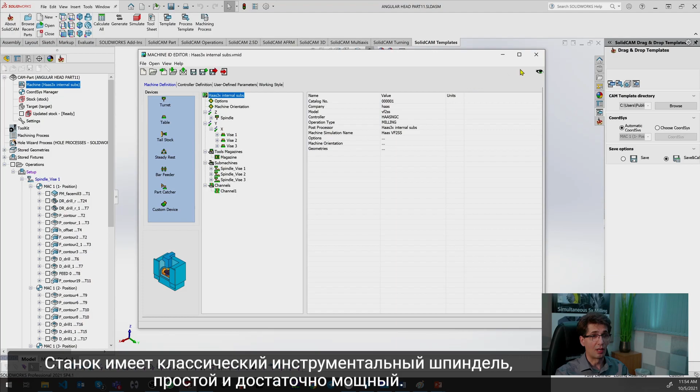In the following example, I want to show you a simple prismatic 3-axis part, machined on a 3-axis machine. Let's see the machine. This machine is a Haas VF2, really simple one, classic, very powerful, and we are using 2 vices for this part. You can see it in setup.

Vice number 1 holds the part for the initial state, and vice number 2 holds the part for the second operation. So once you click here on vice 2, you can see also the second part. It's in transparent mode, so you can see this is the initial one and the second operation.

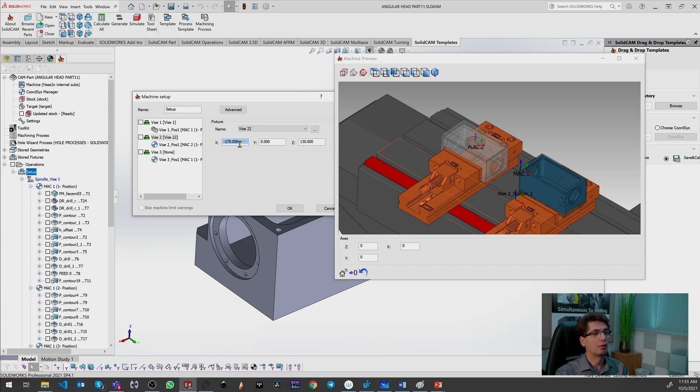Here is the setup. I am going to change it a little, just drag it 100 mm in X direction, make it a little bit closer. So what I see here is the order of operations, and let's try to analyze it. I'm not going to open each operation and show what's going inside, but let's analyze the order of operations.

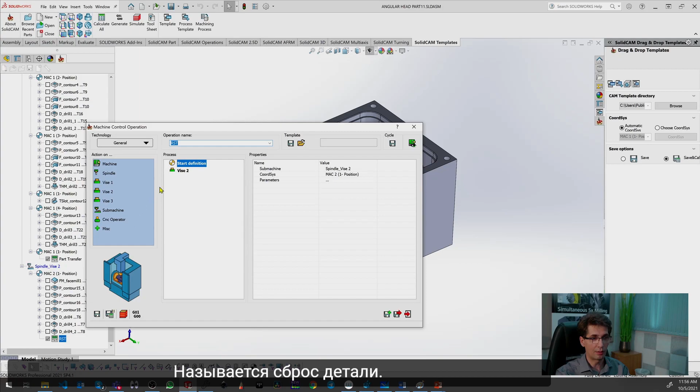So we have the first side machined with MAC 1 position 1. After it we have a part transfer machine control operation, machining of the second side, and the last machine control operation, which is very important for us, called release stock. I'd like to name it RST.

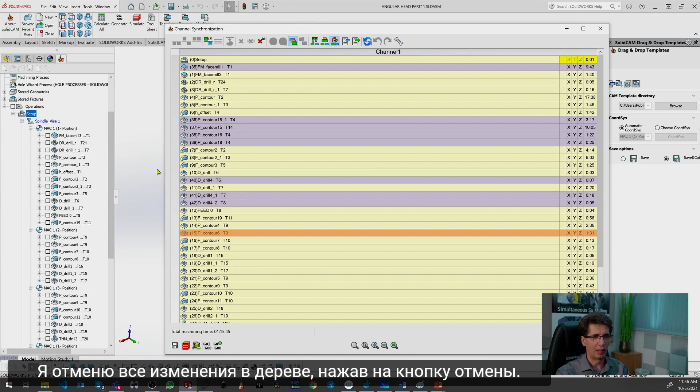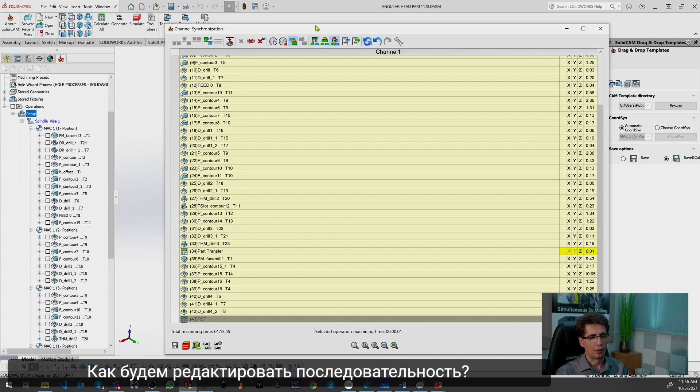So I can go to the setup, right click on it, channel synchronization, and see what we have here. I will cancel all changes in the tree by pressing the X here, and 1, 2, 3 order. So what I see here is the setup, part transfer, and release stock, same as we see in the CAM tree. To understand how to edit it, I can switch to table color view, and now I see it's in different colors. The green color is the first side, and the blue color is the second vice working.

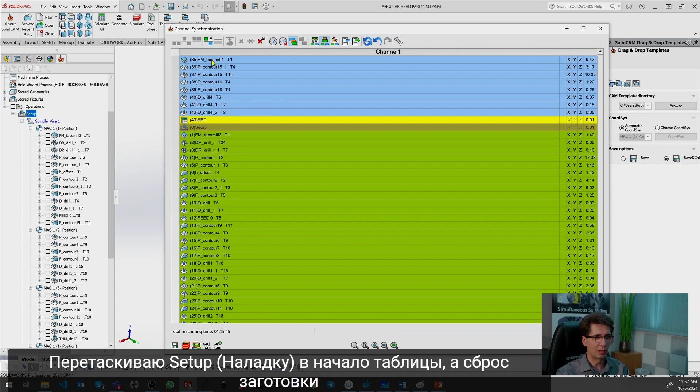Now I can go after the part transfer, right click on it, and add a new workpiece. Once I edit it, all operations jump to the start of the execution order. Now I can drag my setup to the start, drag the release stock to the end, and now I can edit the order.

So first, I want to analyze by the tool numbers if I can save any kind of tool change time. So let's see, I have a T8 running here, and the same tool is used on this side. I can just drag T8 to the second one. Where is it? Yep. And now you see this tool will not change on the machine because the same tool is used in both operations.

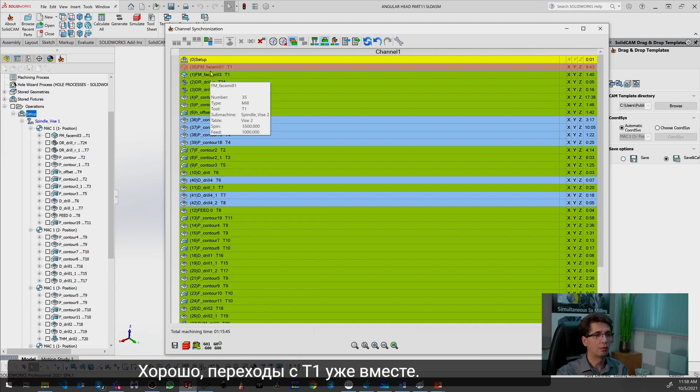Same I can do with T7, T6, and T4. I can drag a number of tools by single dragging, and T1 is already together. So what I see here is 1, 2, 3, 4, and 5 tool changes were skipped because they're not necessary anymore for this kind of order. So I didn't change the operation technology, tool path, or cutting conditions, but I still get 35 seconds of time saving only by reordering the operations without changing any technology.

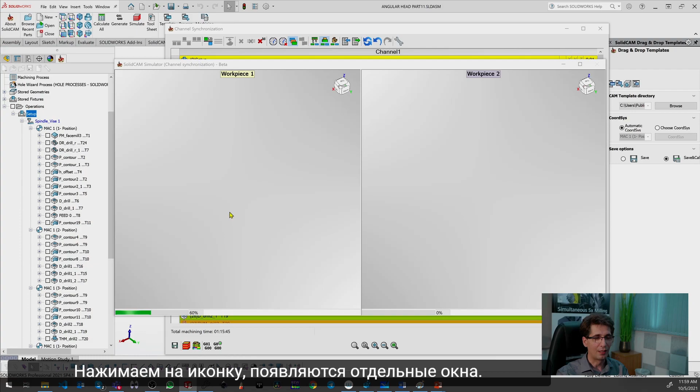So how can I see now in simulation what will happen on the machine? I will save it, and now you see in the toolbar we have a new icon called SolidCAM simulator. If you run it from the channel synchronization, it will always run in multi-channel mode. If I press on it, I will see two separate windows that show us what will happen on the machine. Let's rotate it a little,

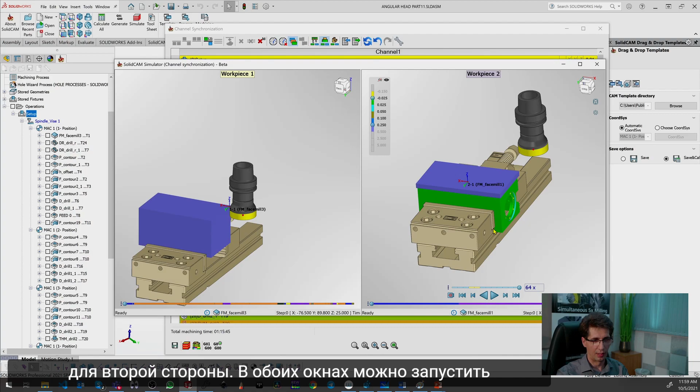and see how it looks. So first, you see the initial workpiece and you see the machined workpiece for the second side. In both windows, you can run the simulation and stop it, depending on which window your mouse is in.

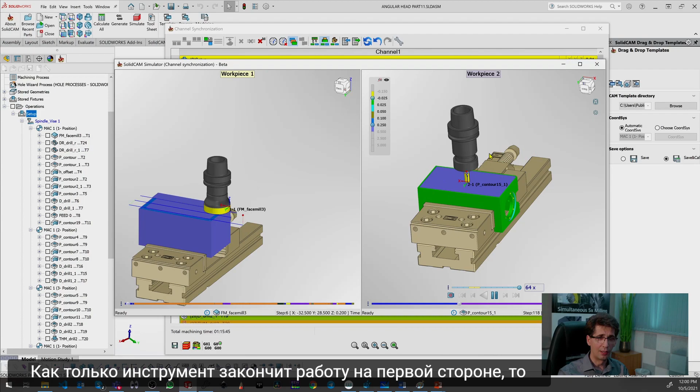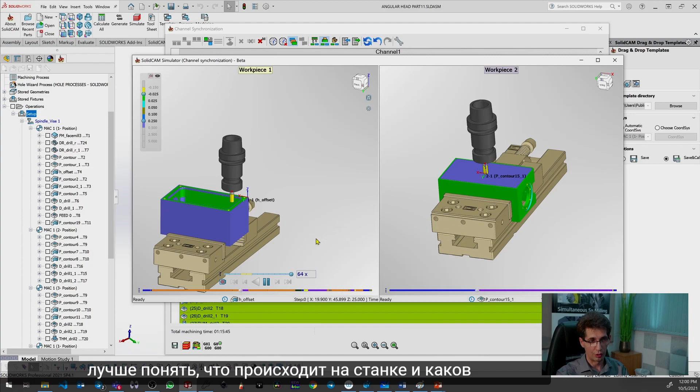Okay, if I run it, you will see the T1 face mill running on the first workpiece, and once it's finished, it's going to the second workpiece. Once we reach T number 4 here, you will see the operation execution will be back to the first workpiece. So it helps us to understand what will happen on the machine and what's the real execution order for this part. Here we see it's back to the second screen.

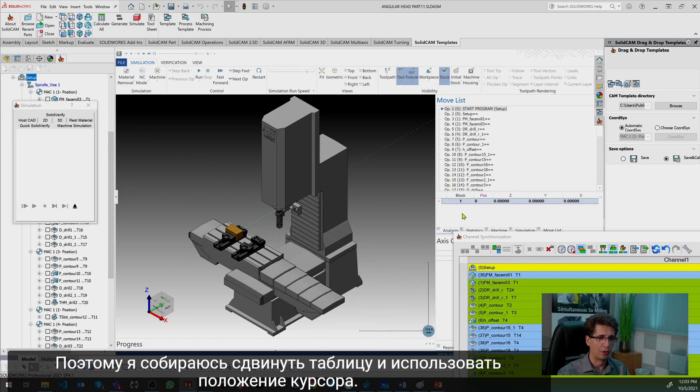I will stop it, okay, and run the machine simulation. Of course, machine simulation will show you the whole machine with all elements inside, and if you're running it from the channel synchronization, it will automatically highlight operations that are executed on the machine. So I'm going to move the list and just drag my mouse there. You see operation number 36 is executed now with T1, so I can go and see it in simulation.

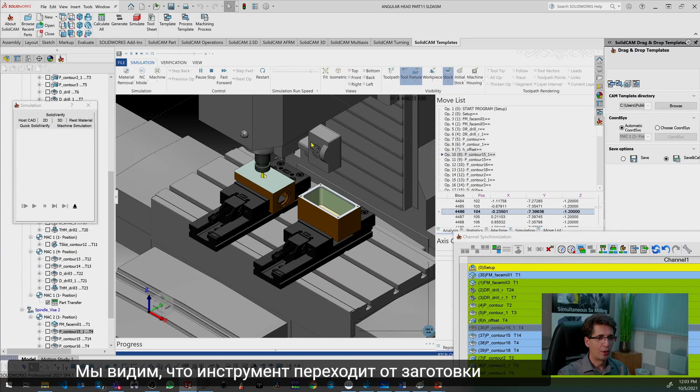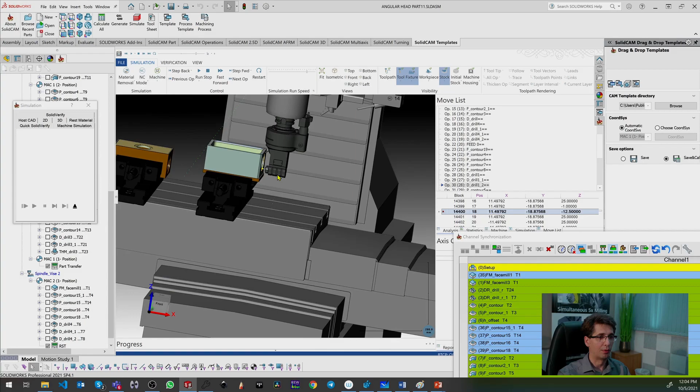So let's run the whole simulation and try to understand if we have any problem inside. Of course you see the tool is jumping from workpiece to workpiece, and it's what we designed. It saves the tool change time. We see now the first problem is recognized. I will stop here and try to understand what happens. Okay, we have a small collision here. I think it's okay for me because it's a cooling pipe. It will not really happen on the machine. It's like a part of the 3D model that can be removed.

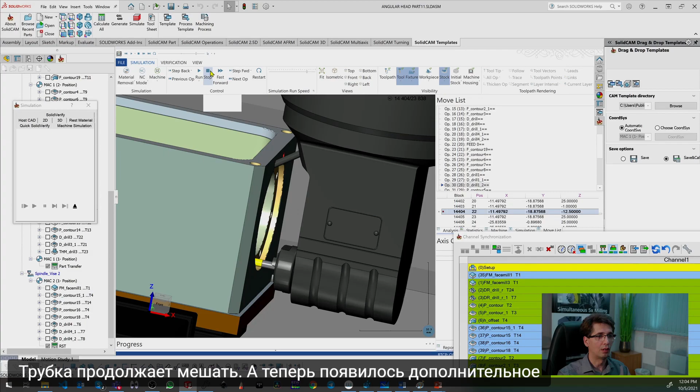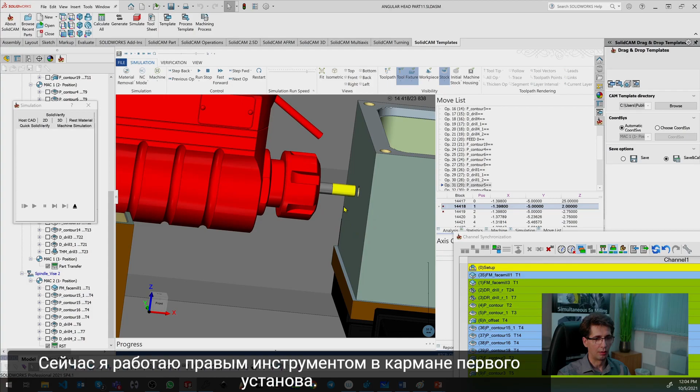And let's continue forward. Okay, we have again the same collision. The tool continues to collide, and now we have an additional collision, but it looks much more real than before. I will stop here and let's see what happened. I'm working now with the right tool on the pocket on the first part, on the right vise, and at the same time I have a collision of the tool with the left part. So how can I solve it?

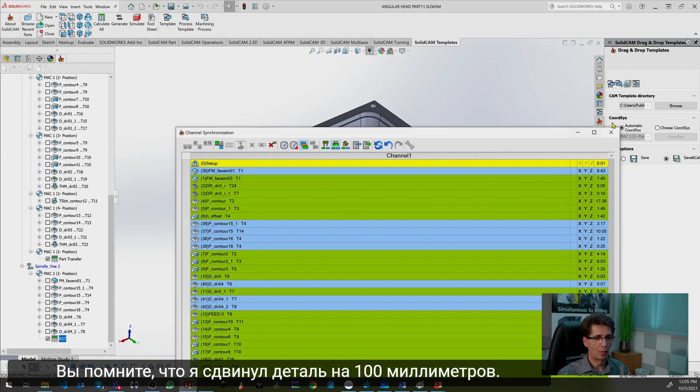Let's stop the simulation and go back to the setup. You remember I moved my part 100 mm. Of course it was on purpose. So let's move it back, and you can verify it in machine preview and see if the distance looks good for you. I think, yep, it's good enough, and let's go back to the simulation. I don't want to start channel synchronization now. I will directly go to simulate and machine simulation here.

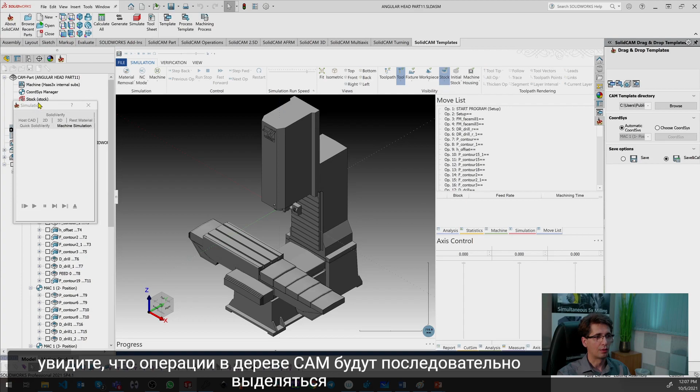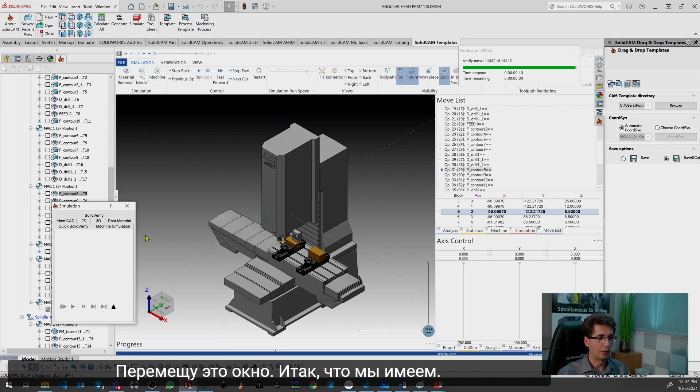Okay. Only one difference: you will not see the real order of operations, but you still will see the highlighted operations in the CAM tree according to the part execution. So if I scroll to the first operation, you will see the operation face mill on the second vise is highlighted. But let's go to the problematic one and try to see what we have now. It's calculating the updated stock. I can move it a little here. And what we see here, okay, there is no collision anymore, and the machine can cut this pocket without any problem.

Okay. Let's go back to the presentation. So as we've seen in this example, channel synchronization can be used even on a 3-axis single channel machine. First, it's used to simulate the multi-sided machining workflow. It helps you to detect collisions between all workpieces that you're going to machine on the CNC machine. It helps you to optimize the machining process and reduce the machining time by skipping tool changes. And of course, once you are using this kind of machine setup, you are reducing run-to-run cycle execution time by adding more parts to the single setup. It gives your machine more runtime and less idle time.

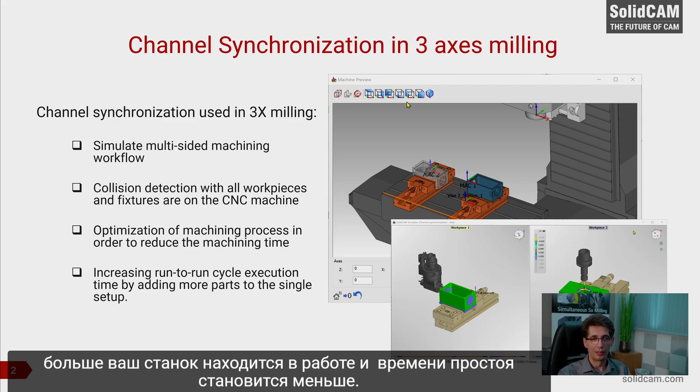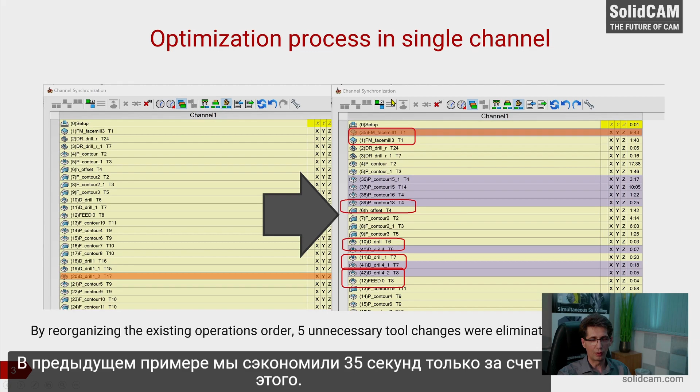Okay. So what we see here is that the initial CAM tree can be optimized by simple drag and drop to avoid unnecessary tool changes. In this previous example, we saved 35 seconds only by this feature. Also, you can verify your execution order in 2 different environments. The first one is machine simulation. Machine simulation gives you the full simulation of what happens on your machine. You can see collisions between all components, even with components not involved in the current cutting process.

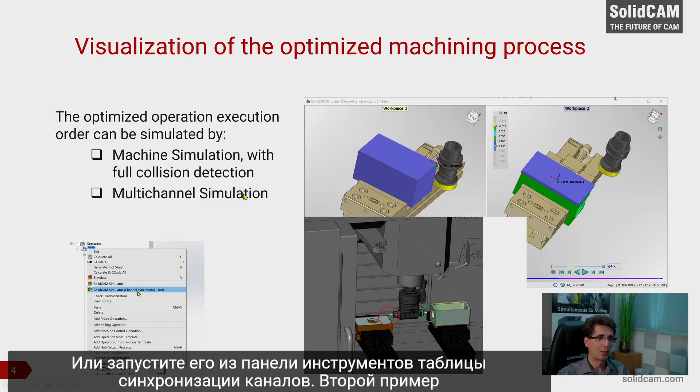And of course, you can use the multi-channel simulation, a new one, to emulate and simulate all processes coming on your machine in all workpieces involved in the process. Each workpiece will show in a separate window. You will not see the collision between workpieces like in machine simulation, but you will see the real operation execution order. To run this simulation, you can go to the setup, SolidCAM simulator in channel synchronization mode, or run it from the channel synchronization toolbar. A second example of using single channel synchronization is working with a multi-table machine and single channel. Let's go to the example.

In this example, I am going to use also a Haas machine, but a very interesting one. It's a new UMC Duo machine, which is what we used to prepare this presentation. So first, before I start to describe what's done here, let's open the machine and see what's happening inside.

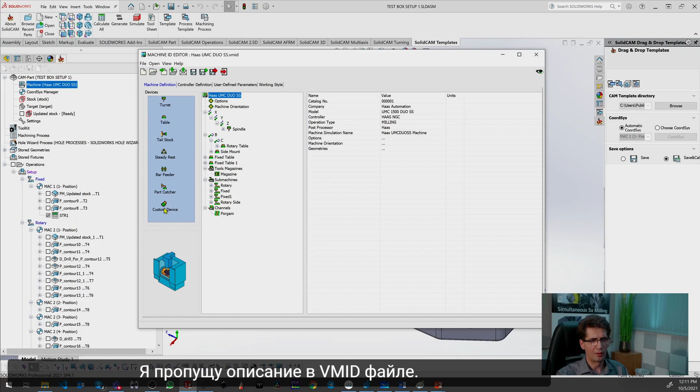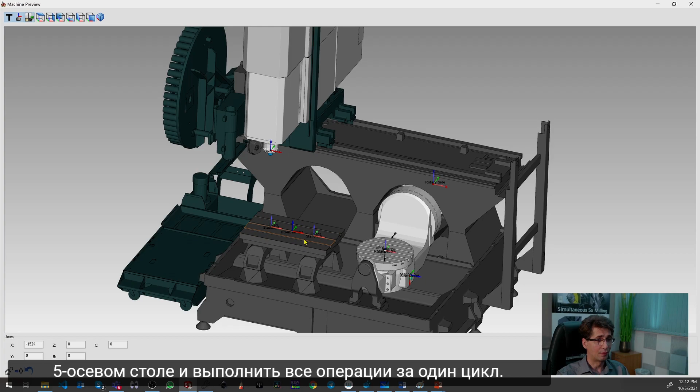I will skip the definition of VMID. I'm going directly to machine preview. What I see here is a classic 5-axis table. We can find it on any UMC machine from the Haas company. And in addition to it, we have a 3-axis table on the side. And from my point of view, it's an amazing idea. You can prepare your part to mount it on the 5-axis table and make a final operation in one single cycle.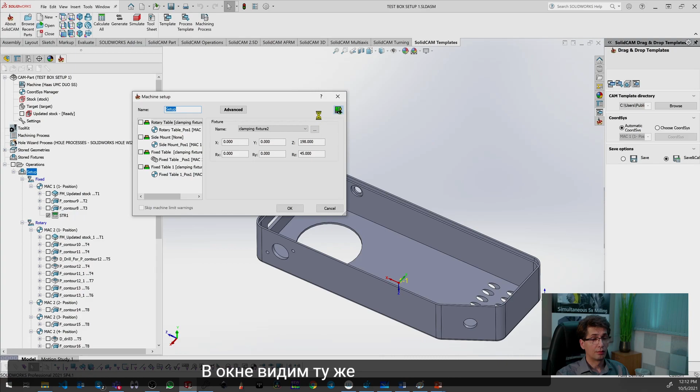So how can we use this machine in SolidCAM? So first, let's open the setup. What you can see in the setup, I go directly to machine preview. First we see the machine, okay? The same as what we see in machine preview in VMID. And here I also see the fixtures. So first I start to work from MAC 1 position 1 fixture, okay? It's marked by stock here, okay?

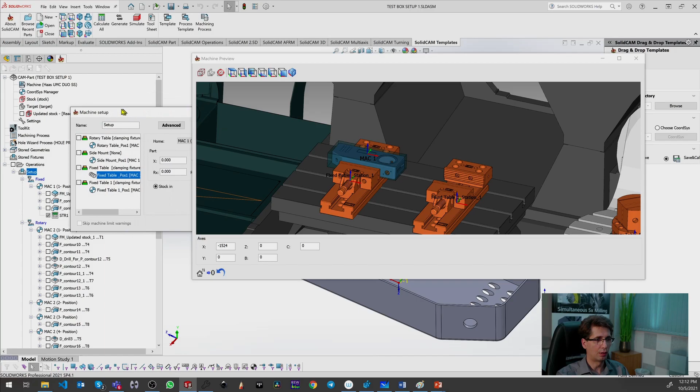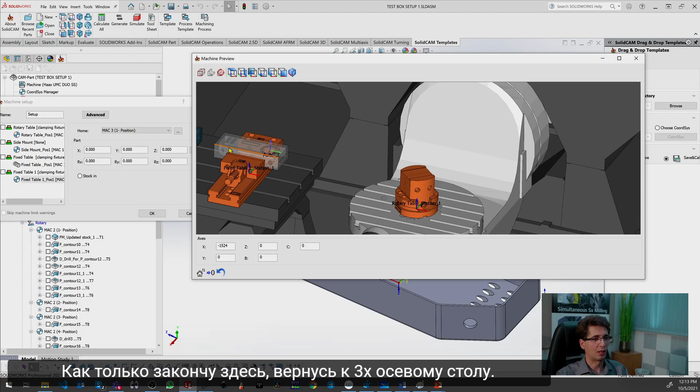I'm moving to the rotary table for the second operation to do all the milling. But of course I cannot mill from the downside because there's a fixture there. And once I've finished here, I'm going back to the fixed table and finish my part. So just to complete the whole machining cycle. Okay.

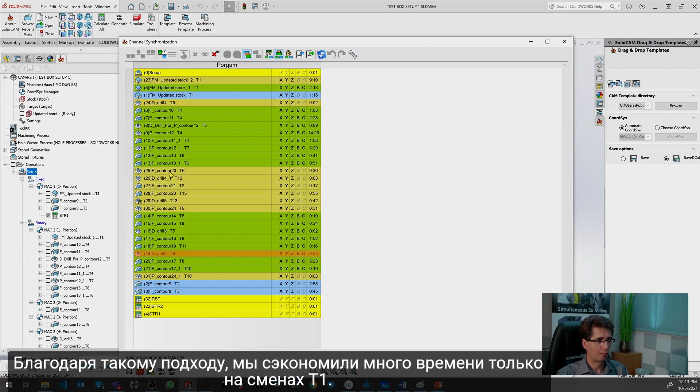If I go to the channel synchronization, I can see the new execution order here. So in this order, we saved a lot of time only on T1. You can see it here. Operation 1 uses T1, a face mill. Operation 2 uses T1 on the rotary table. And the last setup also used T1 to finalize the part.

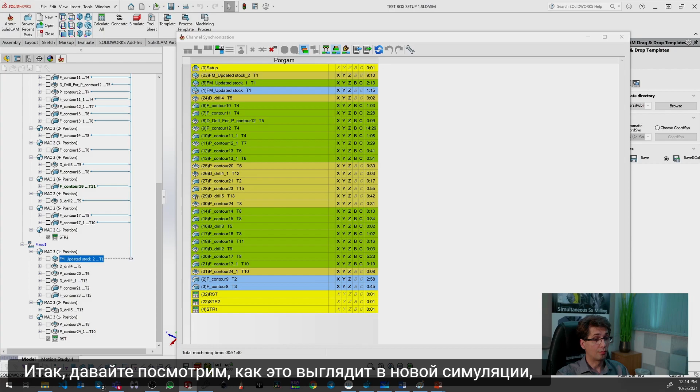So just by organizing this tool in the channel synchronization, I saved 14 seconds. And you can see here a lot of different places where we are saving tool changes. So let's see how it looks in the new simulation channel mode. As I said, we can start it from the toolbar in channel synchronization. It will always start in the multi-channel mode.

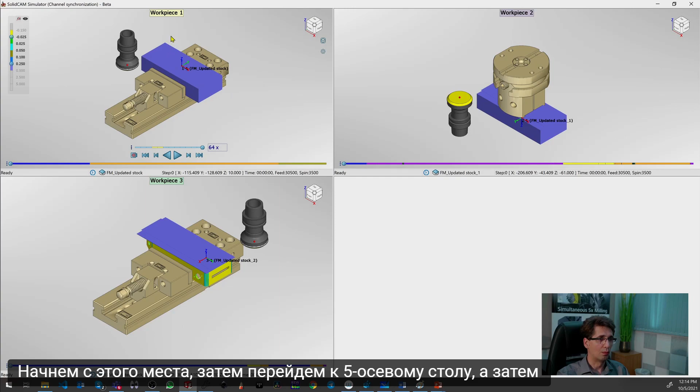What I see here is 3 different windows. It's not 2 windows like in the previous part. And in each window, I see a different workpiece and a different fixture. So we start from here, moving to the 5-axis table, and moving back to the initial table to finalize the part.

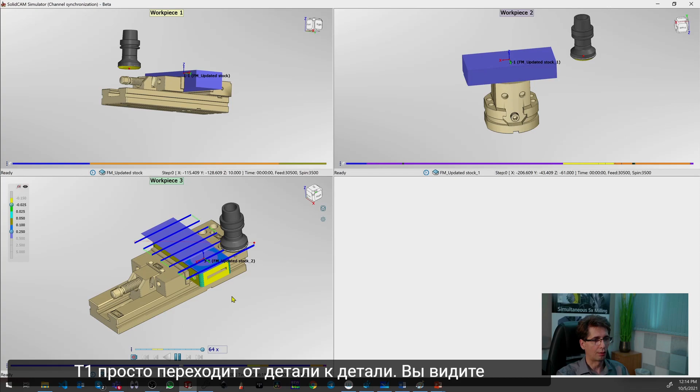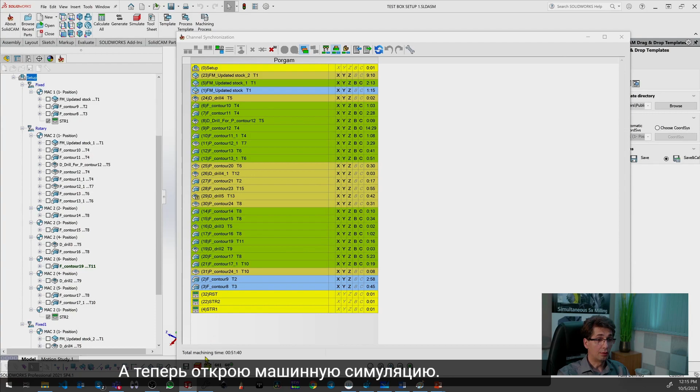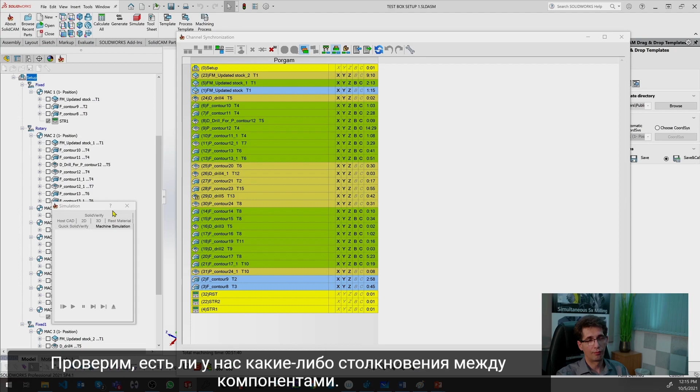Let's run the simulator. And what I see here is that T1 is just jumping from part to part, and you see the real execution order of operations. Okay, we can stop it. And now I will open the machine simulation, and we can verify if we have any kind of collisions between components.

So once I opened it from channel synchronization, my channel synchronization is still open. I can move it down and see what we have in the machine. The first part, initial stock, second operation, and the last finalizing operation on the same 3-axis table. Run the machine simulation. I will do it a little bit faster.

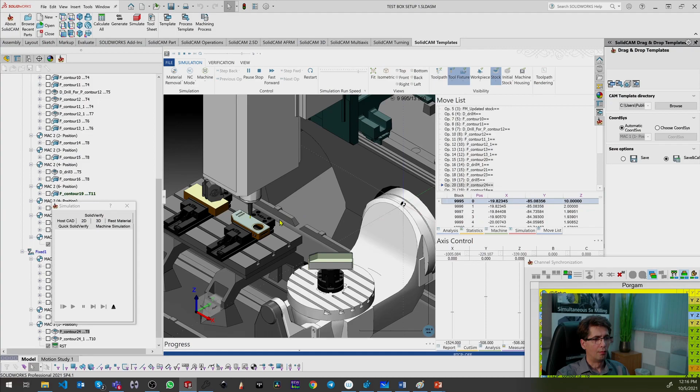Okay. And you see the tool jumps from workpiece to workpiece to avoid unnecessary tool changes. At the same time you see the operation that is executed now is highlighted in the channel synchronization. Okay, the part is finished and prepared for the second part loading. I'll close the part. Let's go back to the presentation.

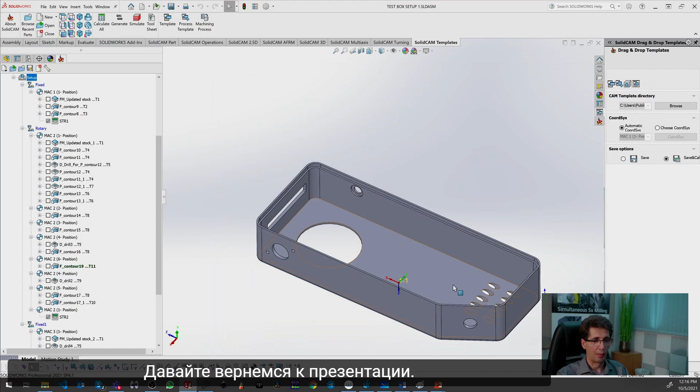So as we've seen in this example, not only collisions between two components mounted on a single table can be detected. In this example, you've seen that collisions even between components that are not mounted on a single table can be detected as well. And we are not limited by the number of workpieces that we can simulate and emulate in our channel synchronization.

Each workpiece will be opened in a separate window. Of course, if you're going to see 6-7 workpieces or more, I really recommend using a second screen, and you can open it on the second screen and see very well what is going on in your simulation.

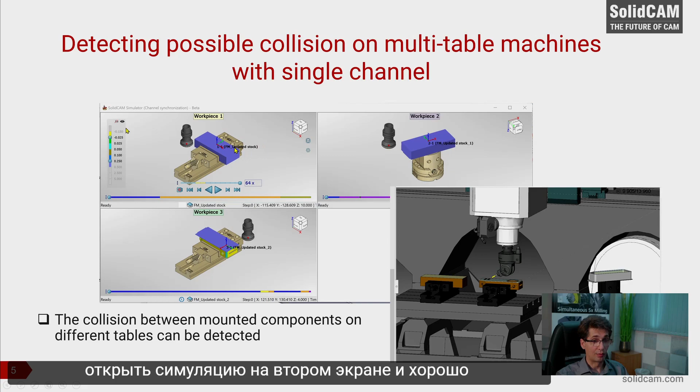Of course, when we are talking about channel synchronization, it's really hard to skip the turning machines. People who use a single channel machine, like the Haas ST series without a lower turret, will really not know the power of channel synchronization and what it can give you. At first, reordering of operations can give you the same benefit as a milling machine, a little bit less because the tool change time is shorter than milling. It takes parts of a second and not 7 seconds like a milling machine.

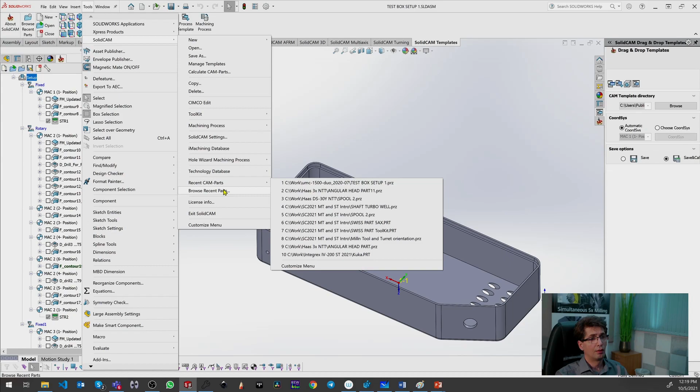But one of the biggest features you can get in a rotary turret machine is the new simulation. I will go back to SolidCAM. Let's open a part with a rotary turret example. The machine I am going to use now is the Haas DS30Y machine. It has 2 tables and 1 single rotary turret, and this turret generally has 12 stations, but additional stations also can be used.

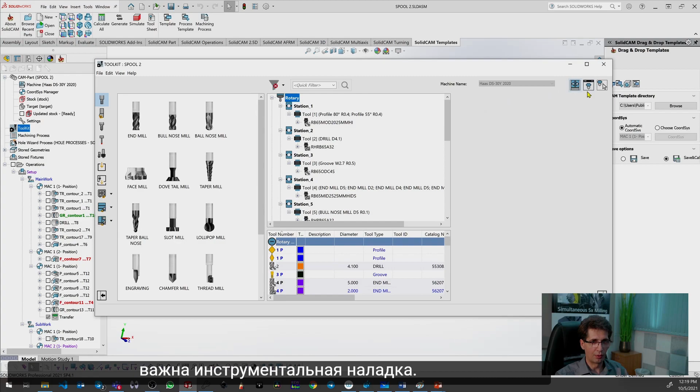So let's open the machine. I'm going directly to the machine preview, and I think everybody is really familiar with this kind of machine. It has a rotary turret, main spindle nose, and the back spindle nose. Close the machine preview. Now I also want to go to the toolkit, because in this machine the tool setup is very important.

I'm going to open the machine preview and you will see what the machine setup looks like here. I'm going to zoom in on it and hide the machine just to see the tools, and you see how many different holders, tools and tool assemblies are used there. You can find this in any company that works with this kind of machine. The tool holders are really complex if you want to get the maximum from your CNC machine.

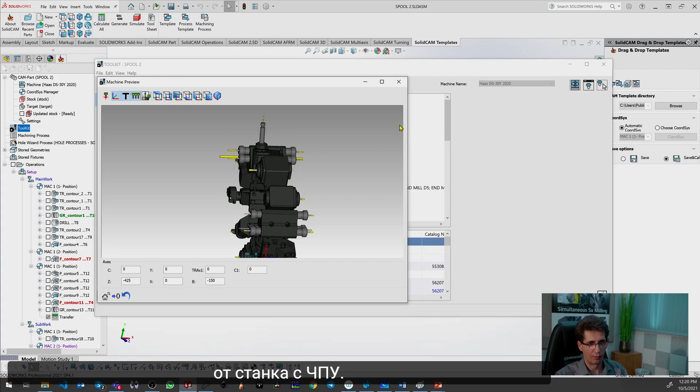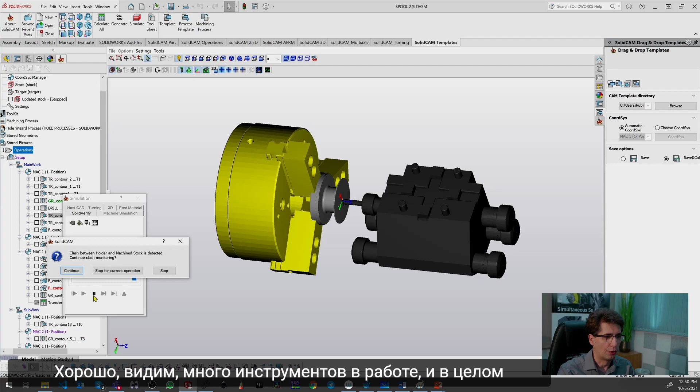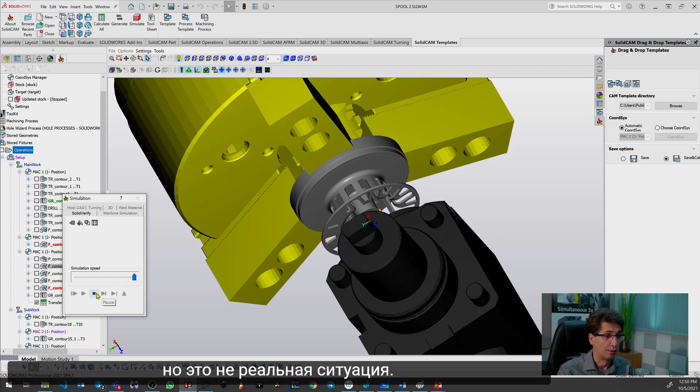So how can the new simulation help you here? I will close it and run our regular simulation, SolidVerify, to see how this part will be done. Okay, we see a lot of tools working on it, and in general there are not too many problems. The part looks good, and we didn't see any critical collisions. But it's not a real situation.

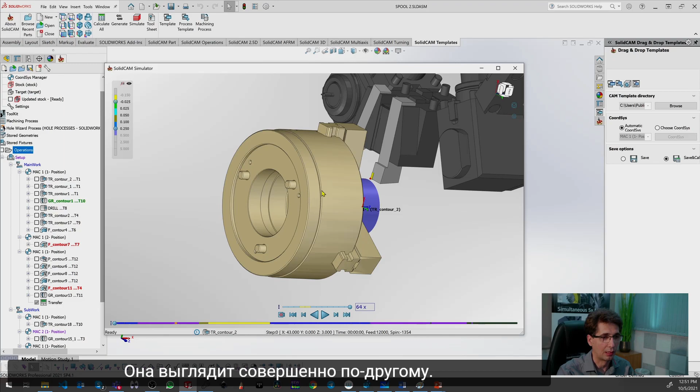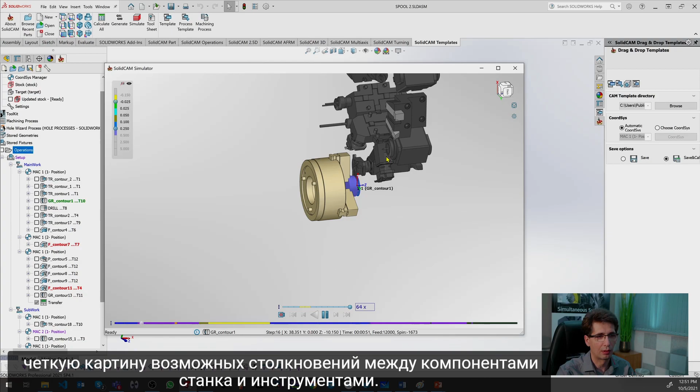Let's mute it. If I go to the new simulation, the picture will be different. Once it's loaded, a lot of holders take a while, we will see the simulation looks completely different. What's the difference we see here? First, I see the whole tool assembly mounted here. And now when I run the simulation, I see a more clear picture of possible collisions between machine components and tools.

Once we reach the internal turning operation, here, let's stop it. We detect a collision, so let's go to this collision and try to see what we have. Here it is. I see a tool that is completely not involved in the process, but mounted on the same station, even on the same turret, colliding with the material during internal turning. So this kind of collision can be verified in the new simulator.

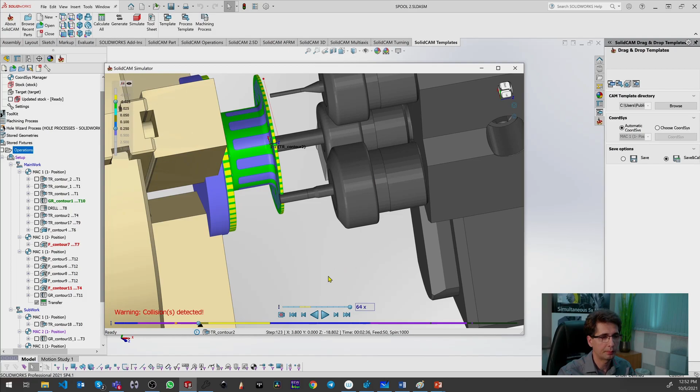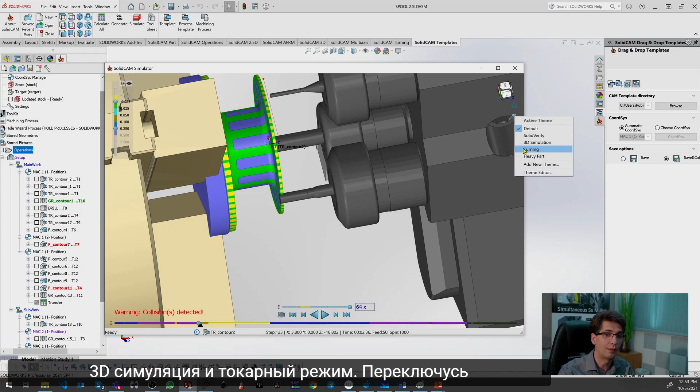Let's go back a little to the machine. Now I am going to the options we have here. You can find default, SolidVerify style, 3D simulation, and turning style. When I switch to turning, we see the well-known 2D simulation, but the difference here is that I see the tools in 3D, so you can more precisely recognize collisions. Here also I see I have a possible collision.

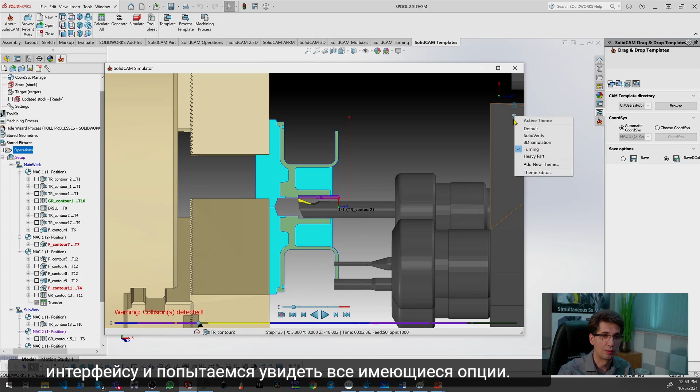So let's go back to the interface and try to see all the options we have. In the first one we have options like a fly-out window. If I uncheck it, I will see my simulation integrated inside the SolidWorks window. Let's go back to fly-out.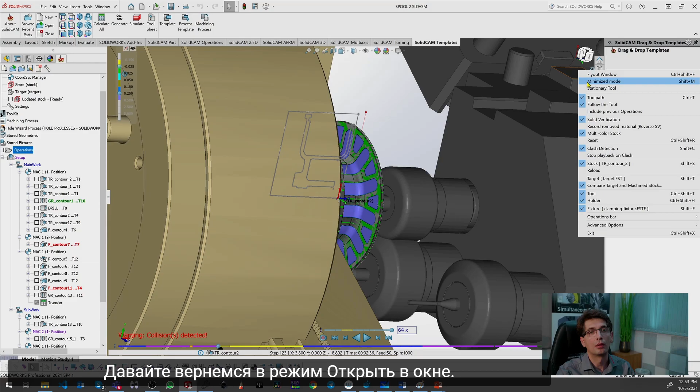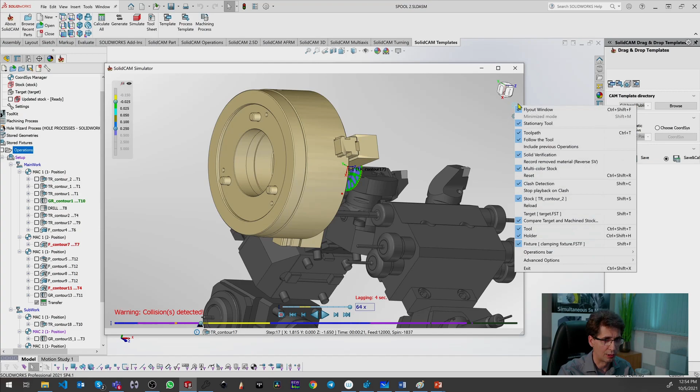You can use the stationary tool option. In the stationary tool option, the part will move and the tool will stay in place. It's not so convenient for mill-turn machines, but it's really useful for milling machines. So I will disable the stationary tool.

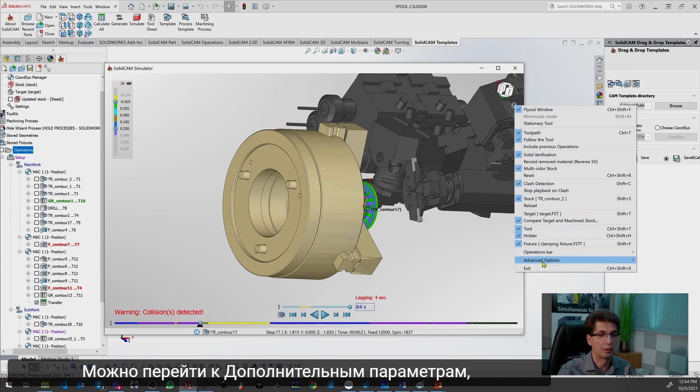You can enable the toolpath view, show the toolpath following the tool, enable or disable solid verification, and a lot of different options. In addition, you can go to the advanced options and see other options. Here we have kinds of styles, and you can use the default style, switch to SolidWorks style, and switch to the 3D simulation style without a fixture.

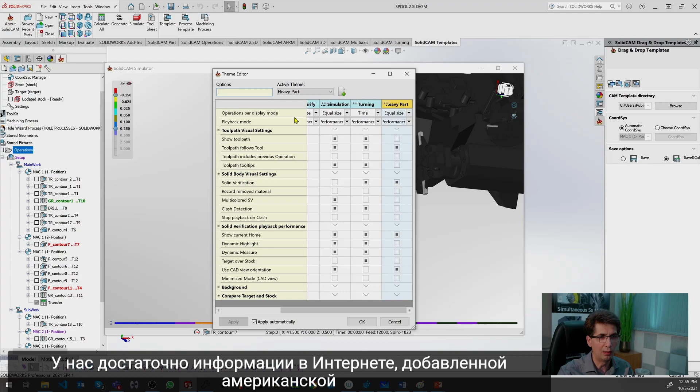Turning part we already seen, and heavy part style, which allows you to use big components and big parts in a faster mode. And of course you can add a new theme or edit the previous one. I believe we have a lot of information on the web done by the US team with explanation how to add them and how to edit them. So I will not go there, but it gives you control of the whole environment you have here. Okay.

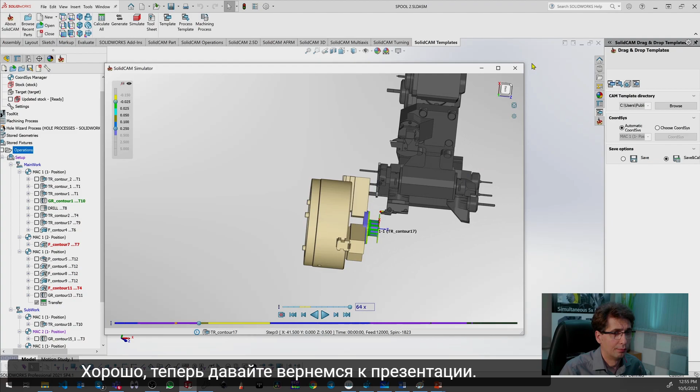Now let's go back to the presentation. Okay. Of course, multi-channel machines are a major target for channel synchronization and SolidCAM simulation in multi-channel mode. This powerful engine helps the user to detect conflicts, analyze workflow, and reduce cycle time by combining operations in a single process. In this presentation, I will not go into these complex tasks because the target was to show how you can use it in simple machines, which are 80% of machines on the market.

But again, I want to talk about it and see what we can do with multi-channel simulation in mill-turn and channel synchronization. So first, you can automatically control master-slave statements. If you have an axis that can be controlled as slave or can control another axis as master, we detect this case automatically and provide the customer the decision whether it's possible to select the master axis for this particular operation combination. We detect operation combinations that are impossible by the machine kinematics.

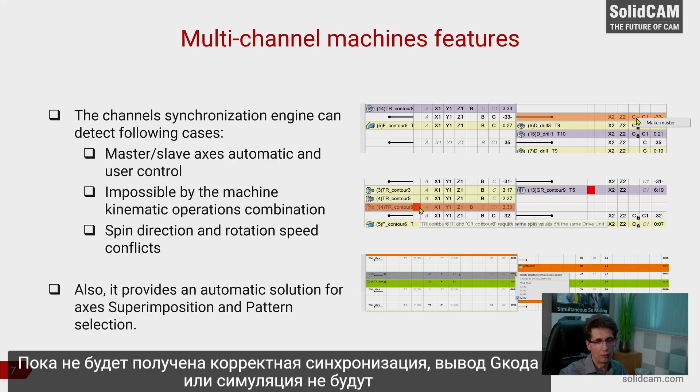The easiest one is if you want to combine milling and turning operations together on a single table. It's kinematically impossible, so we will block it and show you the collision. These two operations have a conflict in the spin ratio, so we cannot execute them together in the same label. Of course, it will provide you automatic solutions for axis superimposition cases, pattern selection, and all cases you can meet in advanced mill-turn. We will not go to the machine simulation or G-code without solving these problems, what we call clashes.

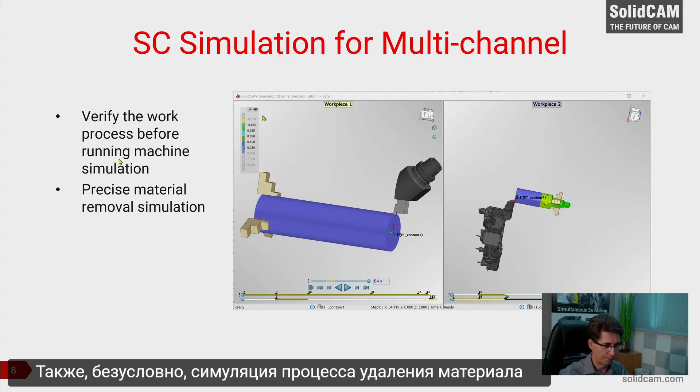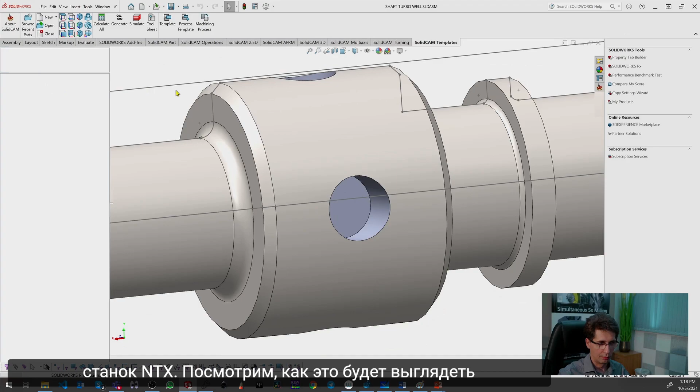In multi-channel machines, the SolidCAM simulation will be used for first verifying the work process before you run the machine simulation and load all the tools and parts into the machine simulation. And of course, the material removal is much more precise in the new simulation. So let's see an example. In the following part, we are running an NTX dual channel machine, and let's see how it looks in the new simulation.

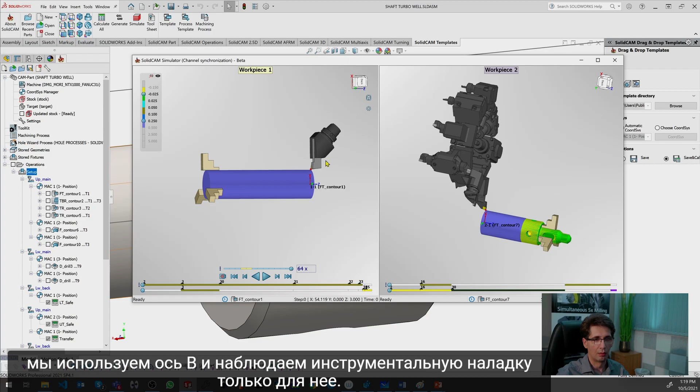First, when I right click on setup, I can find the SolidCAM simulator in multi-channel mode. When I open it, you will see the first workpiece is loaded, and the second on the second screen. In the second workpiece, I can see all tools are mounted together, so if I have any collision between a neighbor tool and the workpiece or fixture, I will see it. In the first screen, we are running the B-axis here. You see now only the B-axis. So let's see how the simulation looks.

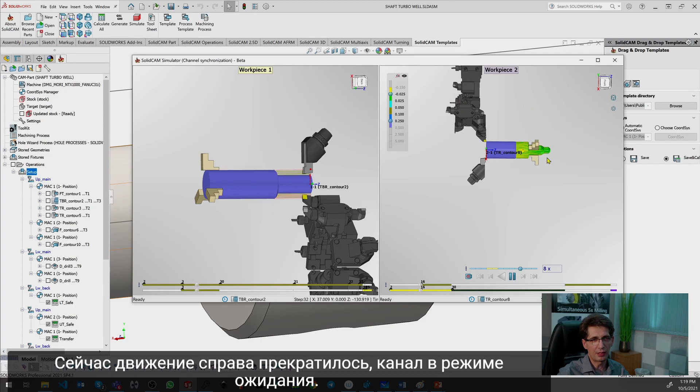I will rotate the component a little because in real life we start in the lower position, and let's see the simulation. Of course, you can see here in the taskbar the two channels are executed. Let's run it. So now I see both channels are executed simultaneously. Both tables are busy working, each one on a separate table. Now this table is idle, waiting for something, but this table is working in balance mode on the part. Once it finishes, we will switch work to the second table.

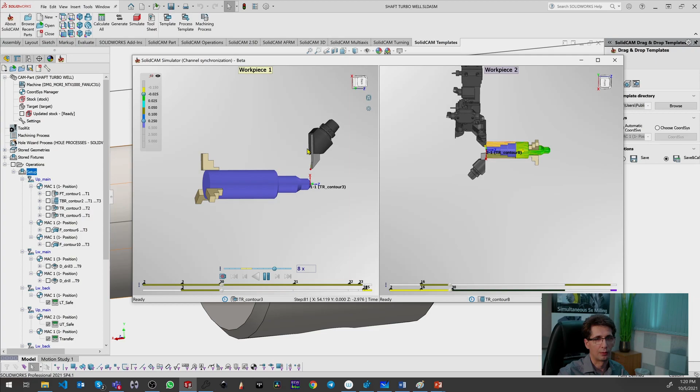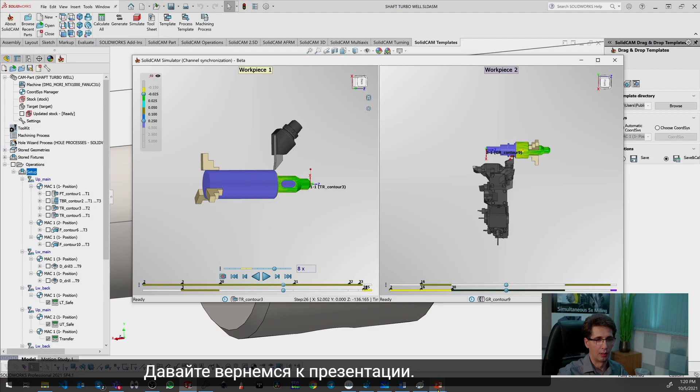So you see the real execution order of operations, how we designed it in channel synchronization, in this kind of simulation. Of course, once you finish the verification and see your toolpath is perfect, you can open machine simulation to finalize the verification process. But running this simulation is much faster and allows you to use all the tools you have in SolidVerify simulation and turning simulation to verify the toolpath and material removal. Okay, let's go back to the presentation.

So I was really glad to present this new functionality to all of you, and I hope everybody will try it and play with it. It gives a lot of benefit not only for multi-channel machines, but also for single channel, simple 3-axis, dual table 3-axis machines, and 5-axis machines.